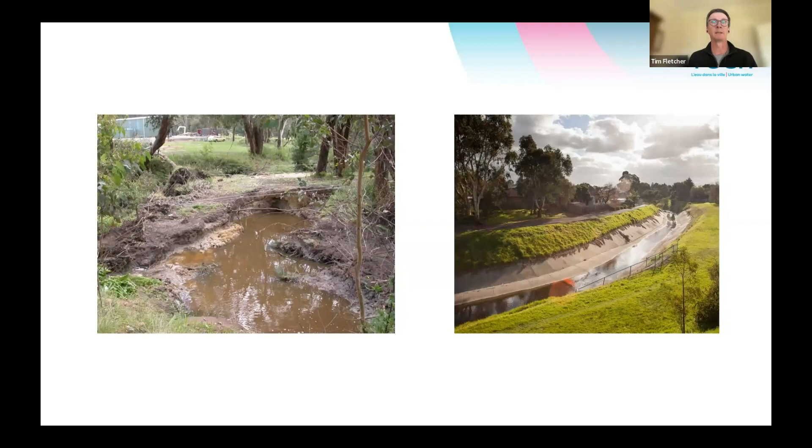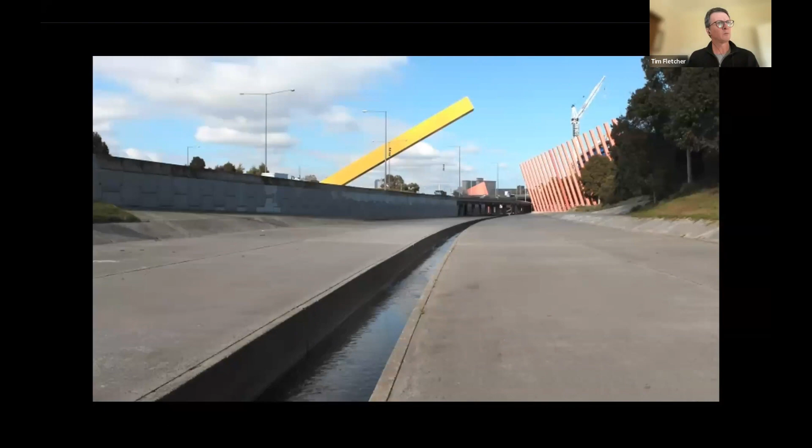It's more likely that the stream you live near, or the closest stream to you, looks like the one on the left, perhaps eroded, so that one's out at Mount Evelyn, or looks like the lined Moonee Ponds Creek, or even worse, looks something like this. And you might ask yourself, well, whose fault is that? Whose fault is it that the streams in urban areas look so degraded?

And I'm going to start provocatively by saying it's your fault, actually. It's your fault because you choose to live in a house that has a roof to keep your carpets dry, and you choose to likely have a driveway that's made of concrete or something like that, so you don't get bogged, and then likely to have a bitumen road outside your place. All of these things make urban life more comfortable, but also result in a complete change to the way water moves through the landscape.

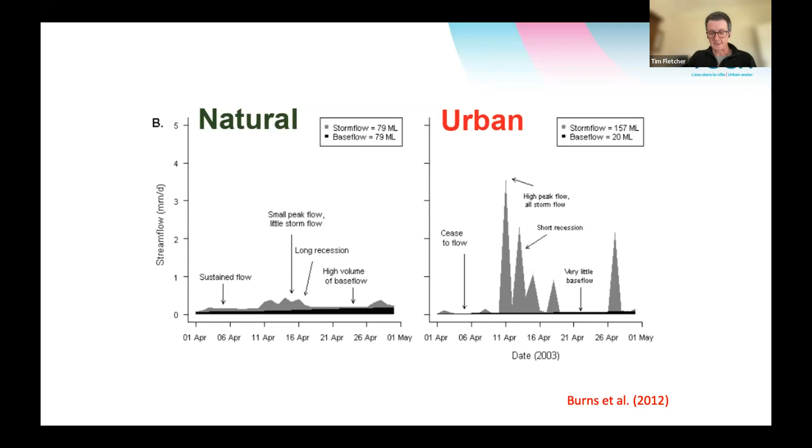So not surprisingly, we see very rapid and substantial degradation of waterways. So someone called Chris Walsh coined the term the urban stream syndrome, basically explaining all the changes that occur to urban streams and basically concluding that you lose their structure, you lose their habitat, you lose their biodiversity, you lose their ecosystem services. There's nothing but bad news in there.

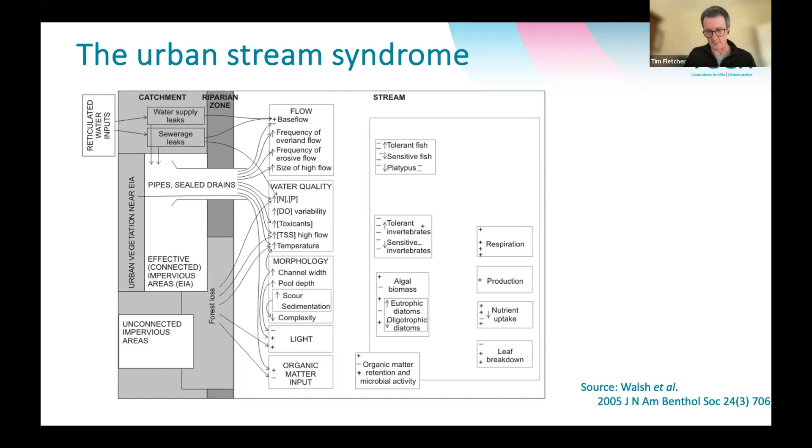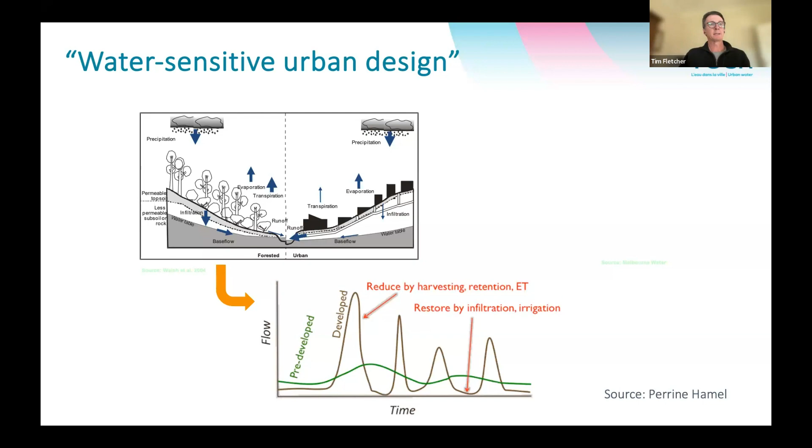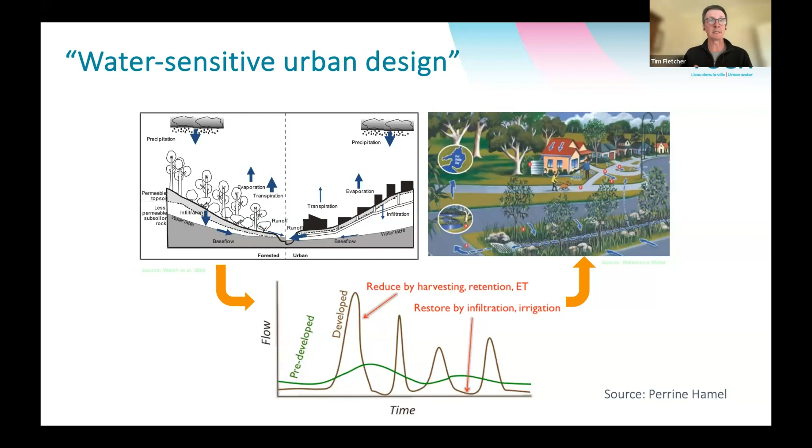So over the last couple of decades, the concept of water-sensitive urban design, which has different terms around the world, aims to reduce those peaks and restore that base flow using a range of bioengineered concepts. So putting in place systems in the landscape that mimic what naturally would have occurred. Of course, we can't ask you to remove the roof off your house so that it's now permeable, etc. But we can do things like rainwater tanks that will hold back that water, things called rain gardens that allow that rainwater to go into a kind of garden and then soak into the soil, or wetlands, etc. We can engineer things that mimic those natural processes.

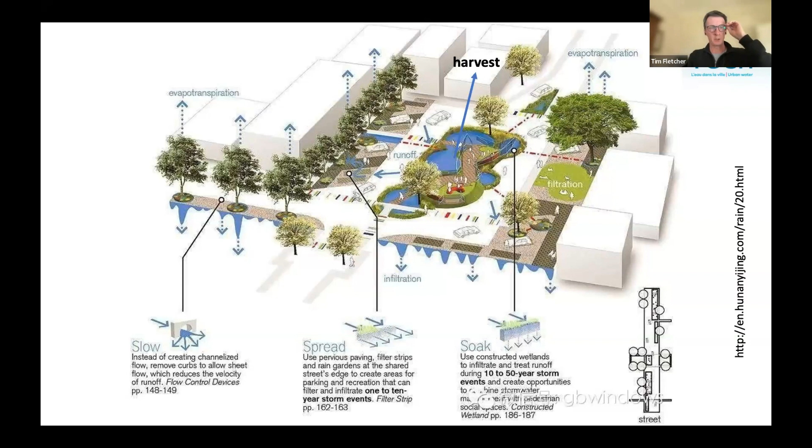We are already in Victoria having early discussions about creation of additional desalination plants, which will increase the energy cost and the financial cost of water supply through the network, particularly in the western side of Melbourne and down to Geelong. So there are already government level discussions on this, looking at future droughts. The potential of harvesting stormwater is one cost-effective and environmentally effective way of reducing that requirement, because we can harvest that captured runoff.

So a big group of us, including my colleague Matt Burns and I, and led by our colleague Chris Walsh, who's just retired, set about with support from lots of agencies, including the Australian Research Council, but particularly with Melbourne Water, our closest collaborator over the last 20-odd years, to see whether we could apply these water-sensitive urban design technologies and improve the stream, get the stream back to a healthy state.

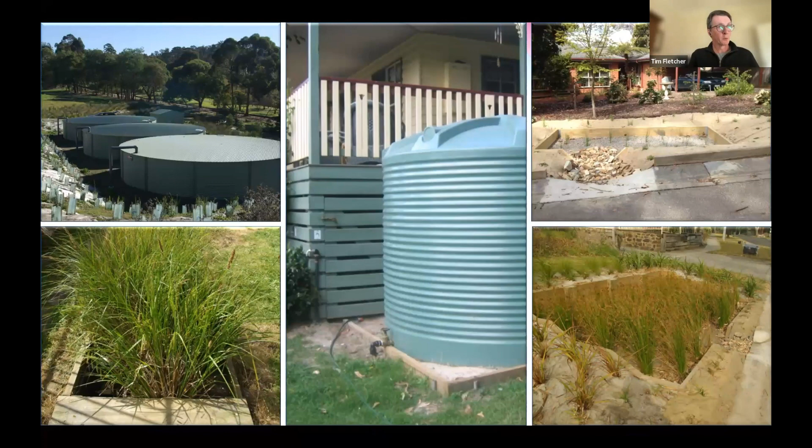So we spent a lot of time building a lot of systems. Our partners paid for a lot of these systems to be built, but actually Matt and I and our colleagues spent a fair bit of time on shovels and excavators and all sorts of things, building things as well. We built some 300 of these systems around the catchments, or the streams we're interested in restoring, and we measured their change over time in terms of hydrology, so flow through the streams, and water quality, and we compared those to streams, or catchments, so the areas that drain into the stream, that we didn't do any work on.

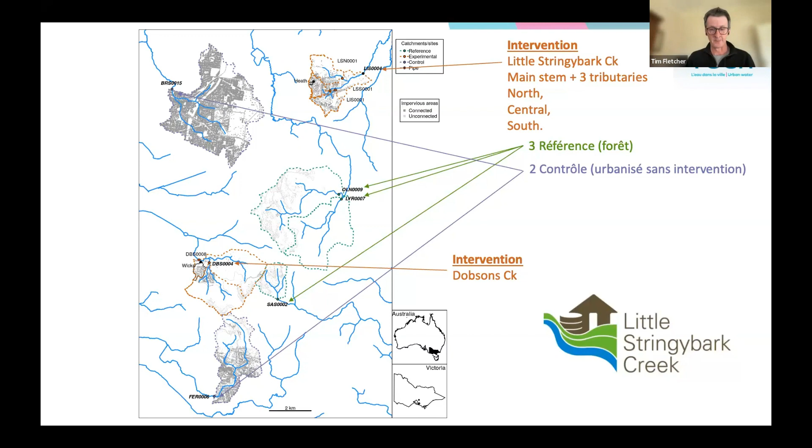So this was what's called a BACRI experimental design: before, after, control, reference, impact. So we measured before for many years. We did about 15 years of building these things, and we measured during that time, and then we measured after, and we measured the other catchments as well, so that we could assess whether there was a change.

And to do that, we obviously had to work extensively with the community, because a lot of the land is private land. If we want to deal with the runoff from someone's roof, we need to be working with them. So we used some novel economic instruments, reverse auctions, etc., to fund that work. We, as I say, spent about 15 years on those interventions, about $10 million, and we did monitoring throughout that time.

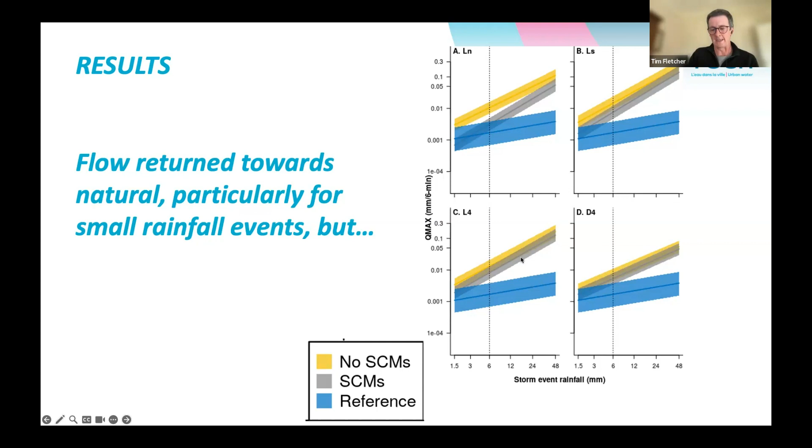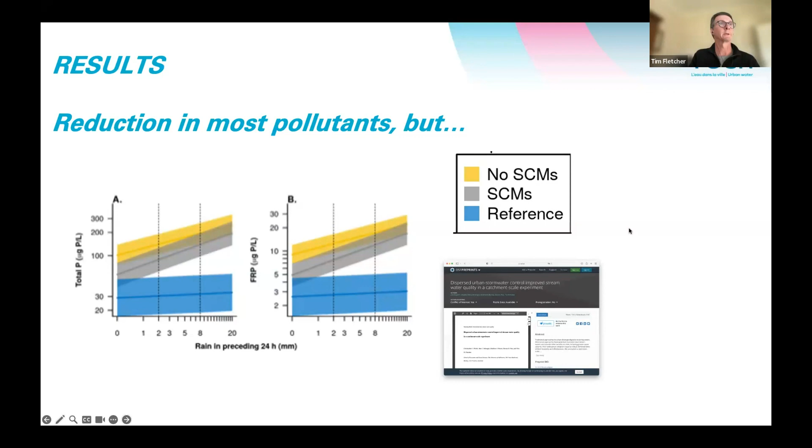If we look at our water quality results, same sort of structure here. In this case, we're looking at total phosphorus, which is a nutrient, but also a pollutant. It contributes to algal blooms, toxic blooms that will kill fish, or kill people if they happen to be particularly affected. So we want to try to reduce the amount of phosphorus going into streams. Again, it shows that our works have been somewhat effective in doing this, but we could have gone further. And I show the paper here led by Chris Walsh, which publishes this work. All right, so I actually wanted to focus more on the but than the results here.

Why the but? Why were we not able to achieve as much as we would have liked? Well, first of all, despite having money to pay people to participate, we didn't really get as much participation as we needed. We kind of ran out of money, and some people weren't interested, or at least weren't interested in the money we could offer. We found that quite a few of the systems malfunctioned over time because they weren't maintained.

So, for example, we installed a lot of rainwater tanks with pumps, and we would often find that up to a third of them, either the inlets were blocked or the pumps weren't operating, and the owners didn't even know. We also found that, for example, during winter, when there's not much demand for water from those tanks, they would be overflowing, so they're not doing what they're meant to. In summer they get drained down, but during winter they're not so effective.

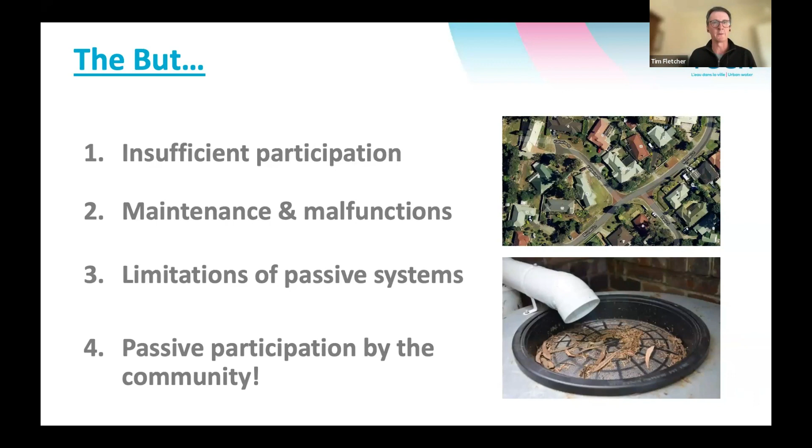And we found that the community relatively was pretty passive. Once they installed these systems, they didn't think about them because there was no incentive for them to think about them. While we were working on that, Matt and I were starting to get very interested in this concept of real-time control technology, the idea where we could use real-time control of these kinds of elements throughout the catchment or the network, and control more optimally the flow of water, the holding back of water, the treatment of water, etc.

And we started to think about how that could overcome some of those problems of maintenance and malfunctions, because you would know when it wasn't working, you'd be getting a signal telling you, and how potentially we could even tap into a more powerful financial model, which I'll come to later.

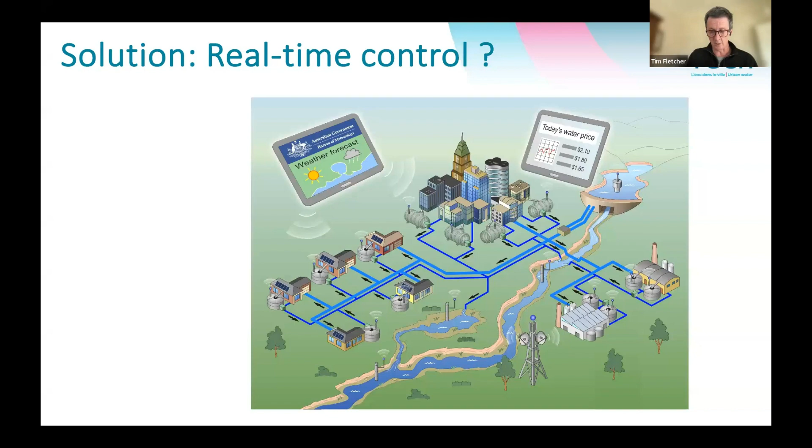So we started through a PhD study undertaken by someone called Wei Xu, who played with this concept of multi-objective control for rainwater tanks, where these tanks are being used for water supply, but also being controlled in a way that reduces their risk of overflowing, so reduces the risk of flooding, and releases water to the nearby waterway on a steady basis in order to restore that base flow that's been lost from the streams.

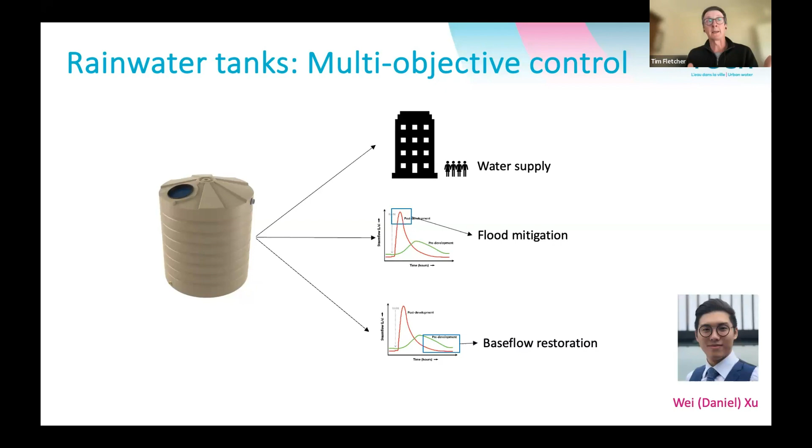Remembering that point I made, that we're not getting infiltration, so we're not getting that replenishment of the groundwater, which is what feeds the streams with water during dry weather. So we think, well, we can engineer that back with this type of real-time control technology. This technology essentially uses a Bureau of Meteorology forecast. We're using the Australian Digital Forecast Database, ADFD. We're receiving a live feed of that twice a day.

And then we are making decisions about releasing water from that tank if a storm is forecast, because we want to create airspace to contain the rainfall that might go in. But we're also making decisions over a longer time, perhaps a week, to release flow at a given slow flow rate to sustain that base flow into the stream.

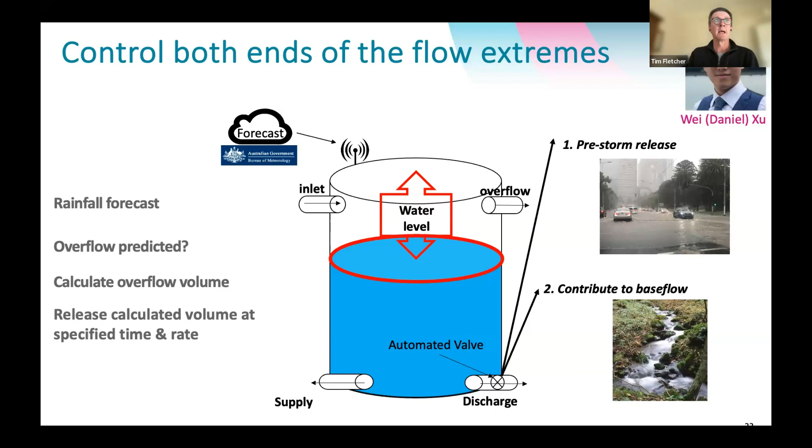And so with Wei and assisted by Kate, we started exploring how to optimize these tanks, and we played with different strategies for controlling these tanks. We're using a 7-day rolling forecast. So we have the Bureau's forecast for 7 days, and we make decisions to release based on that 7 days. And each day we update that forecast with the new information available to us from the Bureau. So we're constantly adjusting our releases.

So if we, for example, determined that we needed to do 700 litres of release in the next 7 days for a storm event that was coming in 7 days, we would make a 100 litre release on the first day and then see what we were told by the Bureau the next day. And we tried different scenarios that focused more on protecting against floods, or more on providing base flow restoration, but these were all rules-based approaches without an optimization component initially.

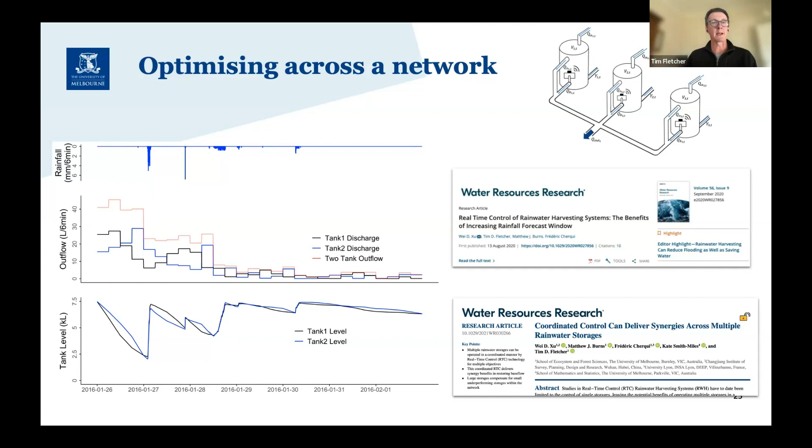We then looked at how we could optimize across a network rather than simply making each tank work individually. So having a sort of centralized control where each tank knew the status of every other tank. So, for example, I might have a small tank, but Matt might have a very large tank, and so my tank will know that essentially it can rely on Matt to pick up the slack when my tank is empty. And we found we're able to achieve quite significant, quite useful gains by that coordinated type of control.

And we collaborated with some colleagues in Quebec, in Canada, who had a catchment where there was significant flooding in their sewer system, their pipe network. And we applied these approaches, combining them with some industry standard modeling tools called SWMM, in order to deliver a flood reduction outcome for that catchment. And the City of Victoriaville is actually implementing some of these works as we speak, so really encouraging.

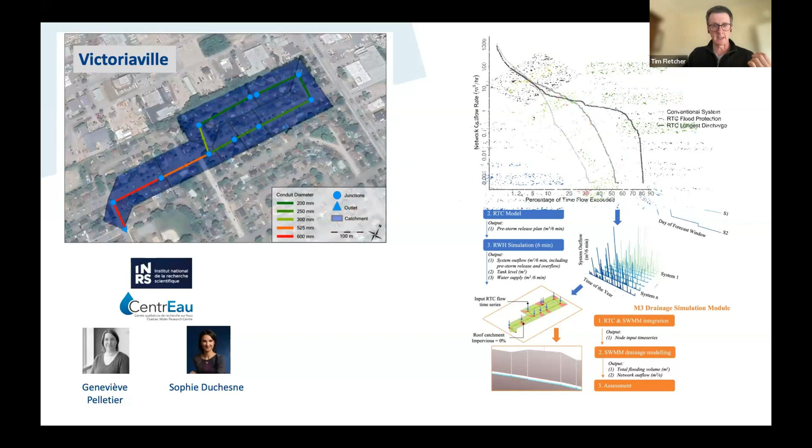So by this stage, we're starting to think there's really some potential in real-time control for networks of, in this case, rainwater tanks, to improve the way stormwater is managed and potentially help improve our streams. And so we started getting interested, from all the work we've done working with the community, in how vital a role they play, because after all, 50% of the impervious surfaces that we're trying to deal with, the surfaces causing runoff, are on private land. Sure, there's roads, etc., and that makes up about 50%, but the other 50% is all your roofs, essentially, and a little bit of footpath, but particularly your roofs.

And so we launched this project where we aimed to explore using a network out in Monbulk, where we've got a whole lot of houses, and you've also got some large existing storages, so Belgrave Lake, Monbulk Creek, or Birdsland Reserve, where we could apply this technology at this scale. And one of our excellent PhD researchers, Yi Zhen, is working exactly on the optimization here, where we aim to see how we can optimize the flow regime, in particular for the platypus. There are 16 platypus in that stream, a threatened species, a really important species, one of only two monotremes in the world. I don't need to go on. Working out how we can protect that species is absolutely vital.

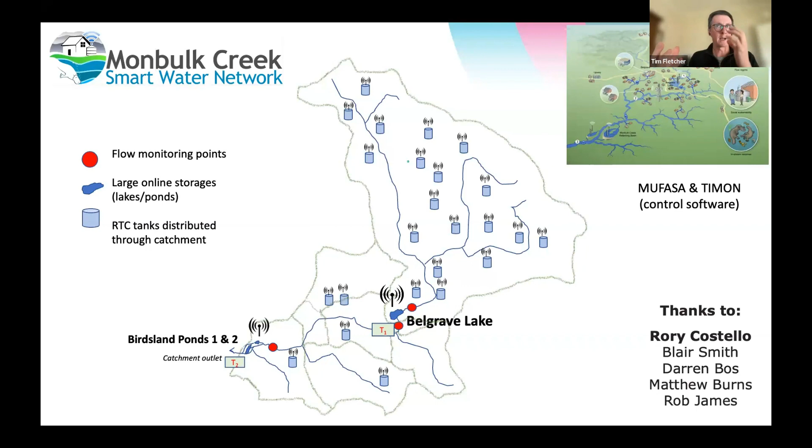So at this stage, we're building a network of all of these tanks and the large storages, and we've written some control software to operate this whole network, including a user interface, so each of the tank owners can have a look at their contribution and optimize how they operate it. This is informed by some quite detailed science about what flow regime the platypus needs. You could do it for other species, for fish, etc., but we're particularly interested in the platypus. And so we understand in quite a detailed way what type of flows we need to deliver at what times of the year to, for example, enhance its breeding success.

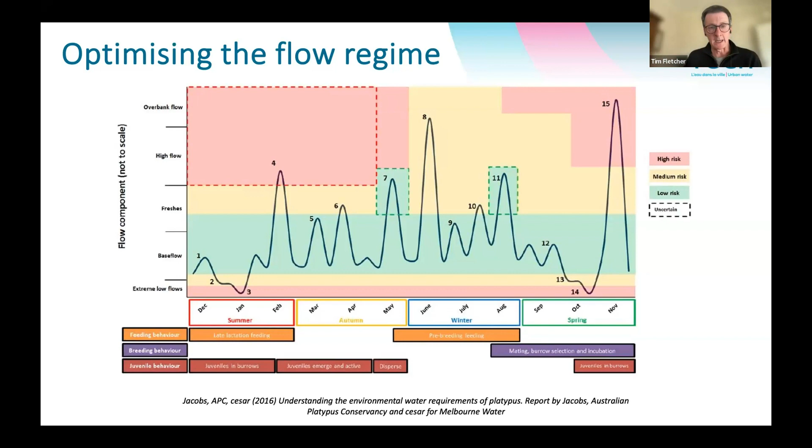All right. So just as an example of how our rules-based code works, we basically read the stream flow each day. We make decisions about whether that's adequate, whether it meets the minimum flow requirement. If not, we calculate the release that's required. We identify all of the storages in the network and ask them how much water they have available. Essentially, we're doing that through an API, an application program interface. And we're doing this across multiple authorities, so this is run on a Melbourne Water server, but connecting to a South East Water server who run all the small tanks.

We ask each tank how much is available, including what reserve level they want. In other words, what proportion of the tank they don't want us to go near, because that's the water they want for their toilet or their shower or their car washing or whatever. And then we make releases from each of those tanks according to some rules. And we have a component we call Mars bars in the desert, where, depending on how full those tanks are, we scale the releases down, because we would rather make smaller releases over multiple days rather than one big release over one day, because we're looking to sustain a flow for the platypus.

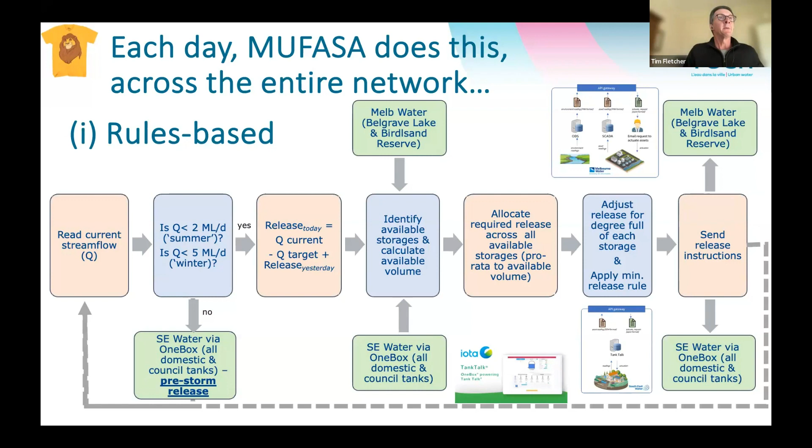If we don't need to make that release to provide a minimum flow for the stream, we simply check the Bureau forecast: is there a need to make a release in order to avoid an overflow, because there's a big storm coming today? And then we'll make that release if we need to. So we run these two bits of code together. So that's how we currently do it, using this simple rules-based algorithm, which we call MUFASA, Melbourne University Flow Allocation Simplified Algorithm. Clearly, we came up with the acronym before the definition. But Yi Zhen is working...

Yi-Zhen is working in a much more sophisticated way to develop an optimization approach to this. So rather than simple rules-based, which, to be honest, work well most of the time, but certainly perform non-optimally and can get caught out, Yi is working on an optimization that considers the reduction in flood risk, maximizes the water supply relative to the demand, so the yield relative to the demand, and also tries to keep the minimum flow within a band.

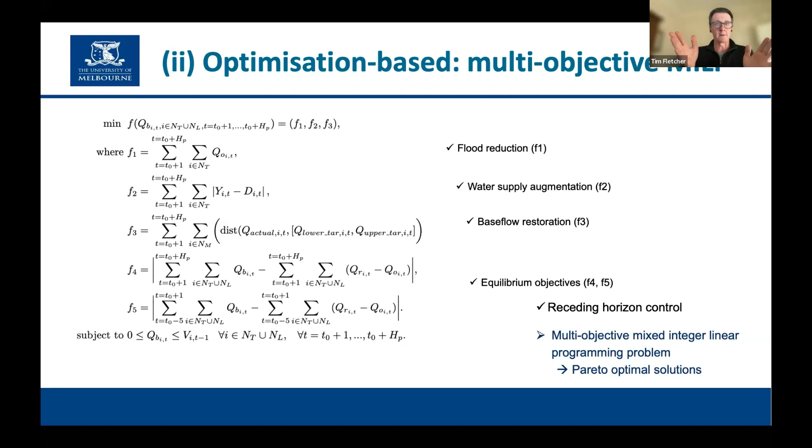So that base flow restoration is trying to keep within a certain band. We don't want too little, but we also don't want too much. It's no longer base flow if we do that. So it's always trying to keep itself within that band. And in order to make sure that the system operates as stably as possible and doesn't get caught out by future conditions that we don't yet know, in F4 and F5, it tries to maintain the system as stably as possible. And it's using, again, as I talked about before, a 7-day receding horizon control. So we're always looking at 7 days and then adjusting each 7 days.

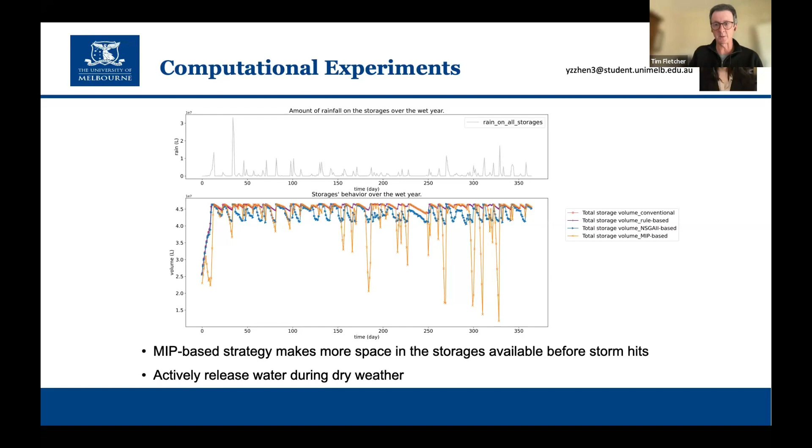When you have an excess of electrons, those go back to the grid, and you are paid, albeit not a lot, for your contributions to that grid. And so that is part of your investment decision and also part of your operating decisions that you make each day. Now, water is a different thing. Water is a lot heavier than electrons. I doubt I needed to tell you that. And so the way it needs to be operated is different, but the basic concept still has some appeal.